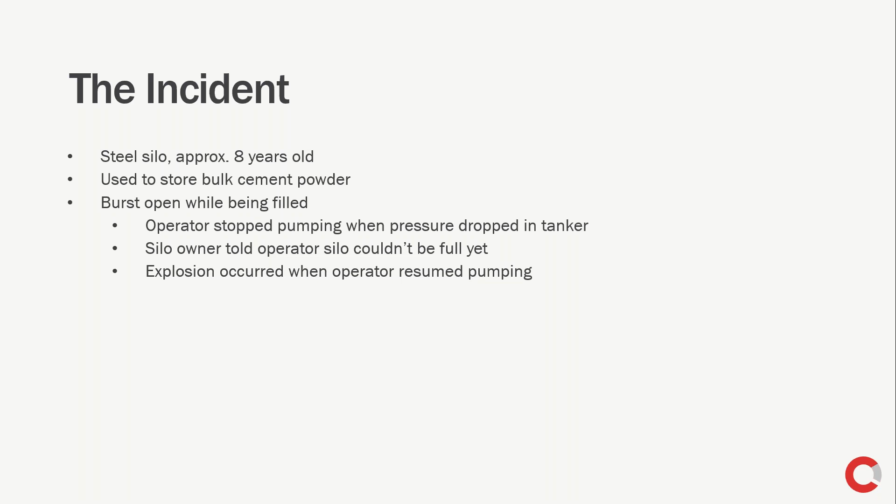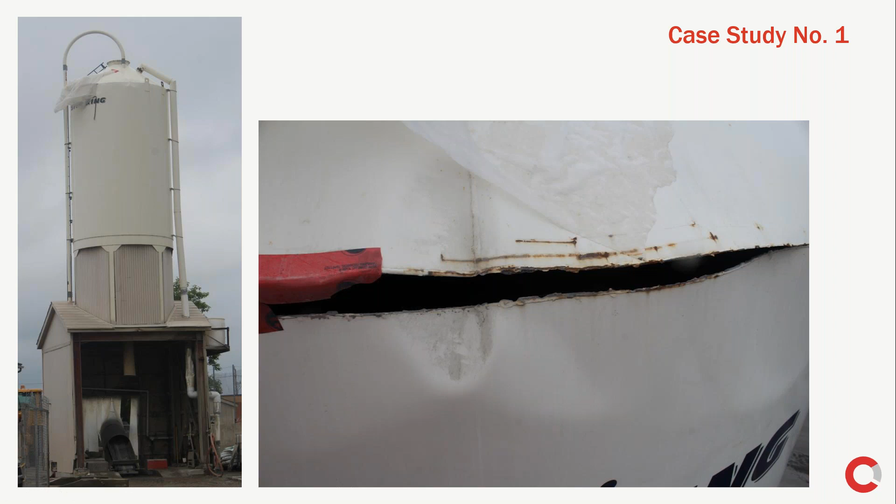So a little bit of background about cement powder distribution, I guess. So cement powder is typically transported by these road tankers. They look similar to liquid containers. They're conveyed into the silos pneumatically. That is, the powder gets fluidized by mixing it with air, and then it's driven with air pressure into the silo.

There are air vents at the top of the silo with filters that are intended to allow the air to leave the silo as it deposits the cement, and the filter prevents the cement powder from escaping through the air vent. The silos are not designed as pressure vessels. The road tanker is, but the silo is not. So the silo has a very low tolerance for overpressurization.

Now, millions of tonnes of cement are handled in this manner every year. It is pretty common. This is the standard practice. Now, as I was mentioning, if the air entering the silo is not vented adequately, then delivering the powder pneumatically can overpressurize the silo, and so you can get a rupture, either the wall rupturing, or you can actually eject the filter through the vent pipe, or it can blow the silo lid off. And in this case, that's where the failure occurs, at the silo lid. So this adequate venting is critical.

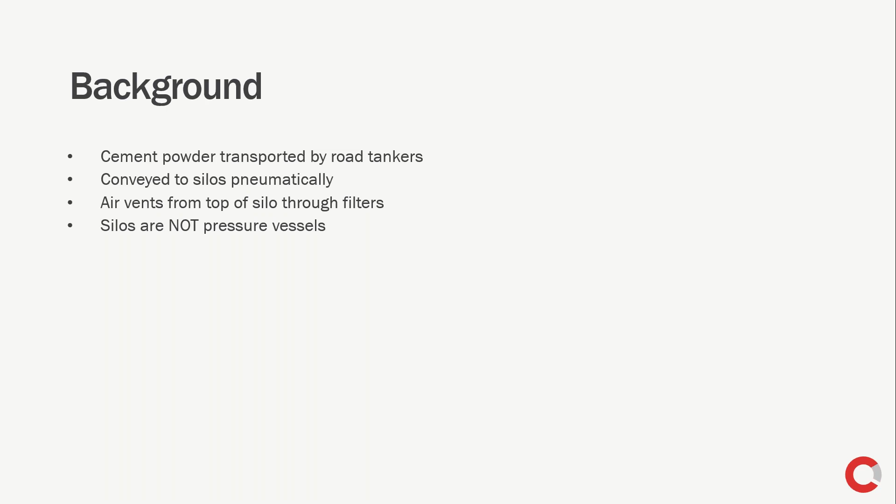And this is a diagram that helps illustrate a little better. So we have the tanker. This is designed as a pressure vessel. They connect a flexible hose to the feed pipe, and then the cement powder is driven pneumatically into the silo. Here we have a filter. It's a little different depicted here than on the subject silo. Here they're also showing a pressure relief device, which is fairly common for these silos. They would have a pressure relief device in order to prevent overpressurization in case of operator error or something.

So down here you'd have a pressure operating around 29 psi, but up into the silo, your pressure would be typically around 1 psi. And if you exceed that, you're putting the silo at risk of failure. So in this particular case, they didn't actually check the level before filling. So when the operator arrives to deliver powder, the standard practice is the operator checks with the owner to verify what the level of the powder is in the silo, so they know how much to deliver.

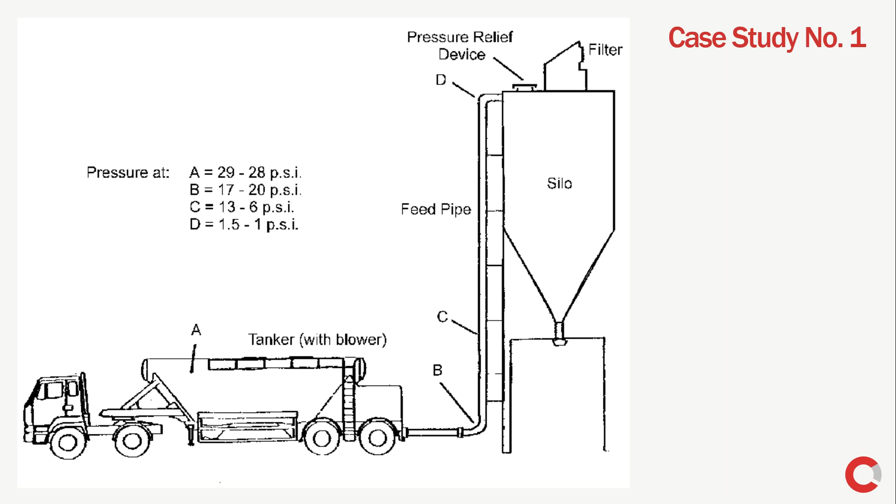Now, at this particular property, the owner didn't have any sensor system or anything, so the only way to check the level of the silo would be to climb up the ladder and look at it physically from the inspection board. And so they didn't bother doing this because that's too much work. So the way they checked the level was they used their handwritten records and did arithmetic. So they had handwritten records of all the powder being delivered to the silo and how much they've discharged from the silo, and they just did the arithmetic and estimated the volume.

Cement powder is sold by mass, but obviously it's the volume that's important in the silo. So they estimated the volume based on density. The density actually varies by plus or minus 5%, depending on how long the powder has been sitting, because it settles over time. So this was not really a good way of checking the level. They also didn't have any safety features.

The standard practice for these things is that you would have both a pressure relief valve and warning sensors. And for the warning sensors, usually you have both a high level warning sensor and a high pressure warning sensor. So if you detect either a high level or a high pressure, you get an alarm and the operator stops pumping cement into the silo. And failing that, if it does overpressurize to some threshold, a pressure relief valve would typically be present so that the relief valve opens and releases the pressure so that you don't destroy the silo. In this case, none of those were present.

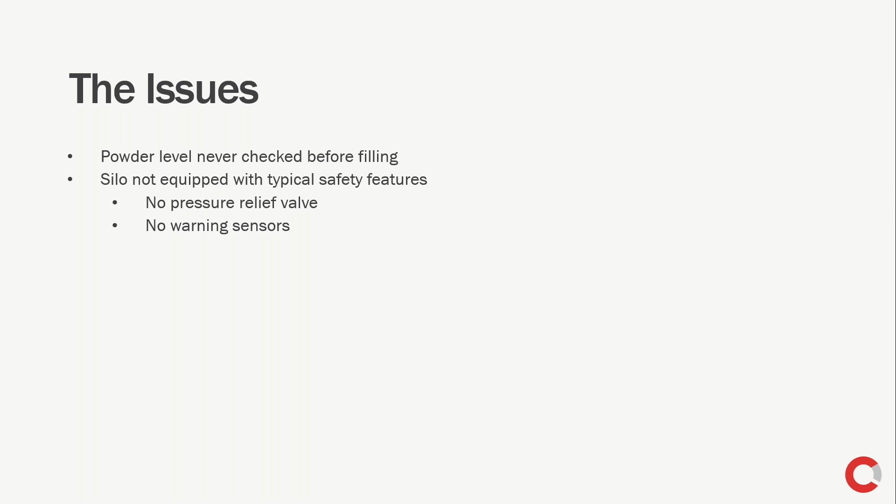And with that, I'll hand things off to my colleague Nabi. Thank you, Adam. Okay, so let me see.

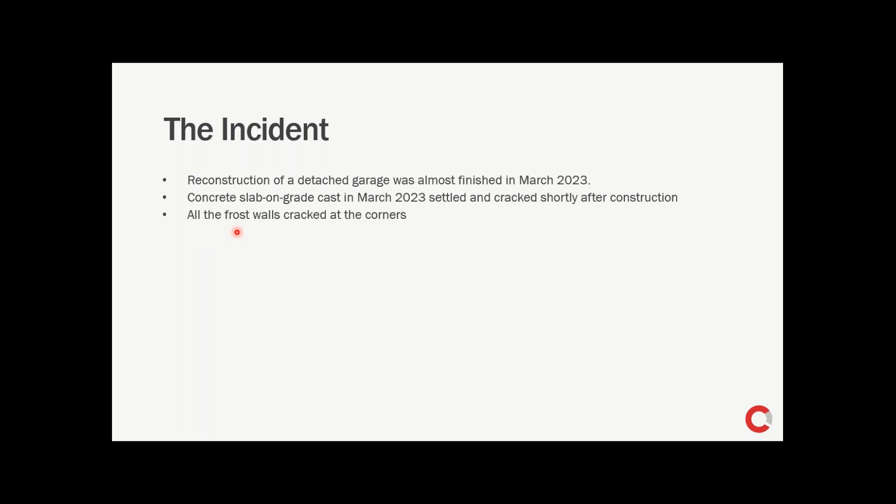So this was about reconstruction of a detached garage that was almost finished in March 2023. And the concrete slab on grade was cast in March 2023. And shortly afterwards, it settled and cracked. And also all the frost walls cracked at the corners.

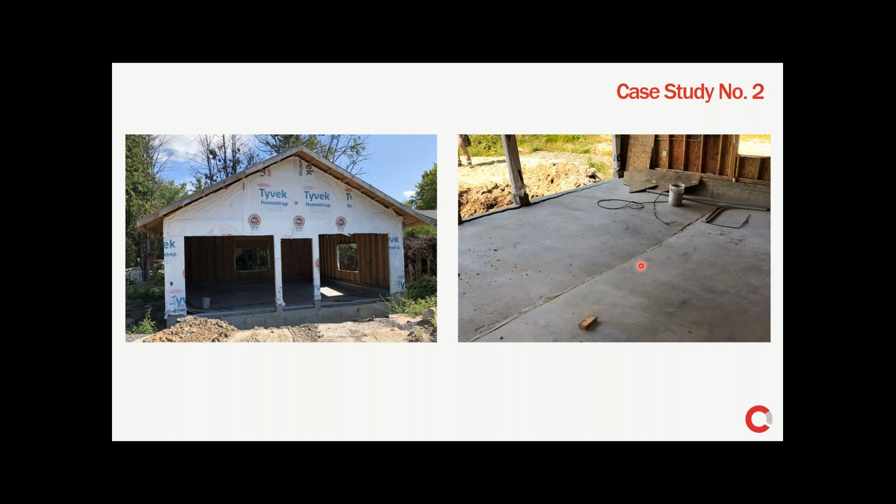So this is the general view of the reconstructed garage. And this is the view of the slab on grade. You can see that there's a wide crack across the garage, and the entire slab has collapsed in the middle.

So as a background, this was a 25 feet by 25 feet wood-framed garage with gable roof that was burnt in fire. The structural engineer at the time decided that it needs to be rebuilt, including the foundation. The frost walls and the foundation were cast in February 2023. The general contractor asked the subcontractor to place the backfill using the on-site material after the concrete was cast.

And the subcontractor warned the general contractor about the water content of the on-site material and absolved his responsibility. So the subcontractor sent a letter to the general contractor saying that because of the water content of the on-site material, we should not do that. And if you sign this letter or assume the responsibility, we will go ahead and do what you're asking us to do. So the GC retained a geotechnical engineer to assess the on-site material.

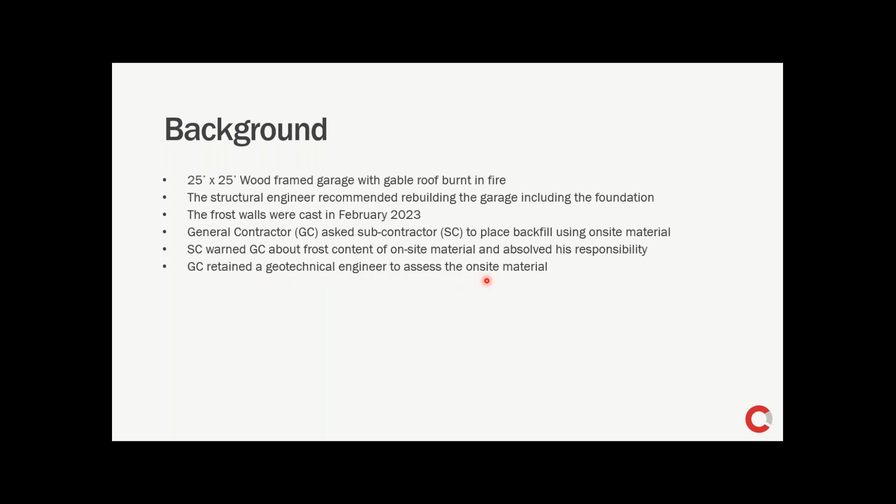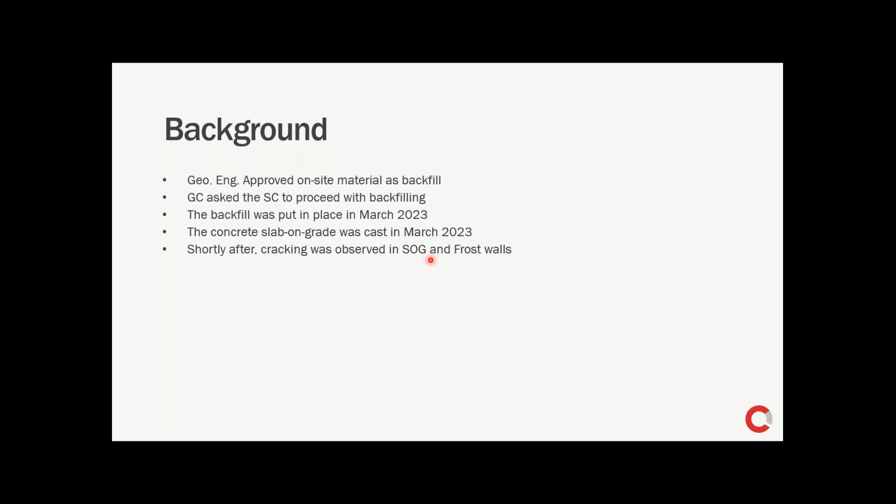And the geotechnical engineer approved the on-site material as a proper backfill. After the approval of the geotechnical engineer, the GC asked the subcontractor to proceed with backfilling. The backfill was put in place in March 2023, and the concrete slab on grade was also cast in March 2023. And shortly afterwards, cracking was observed in the slab on grade and also at the corners of the frost wall.

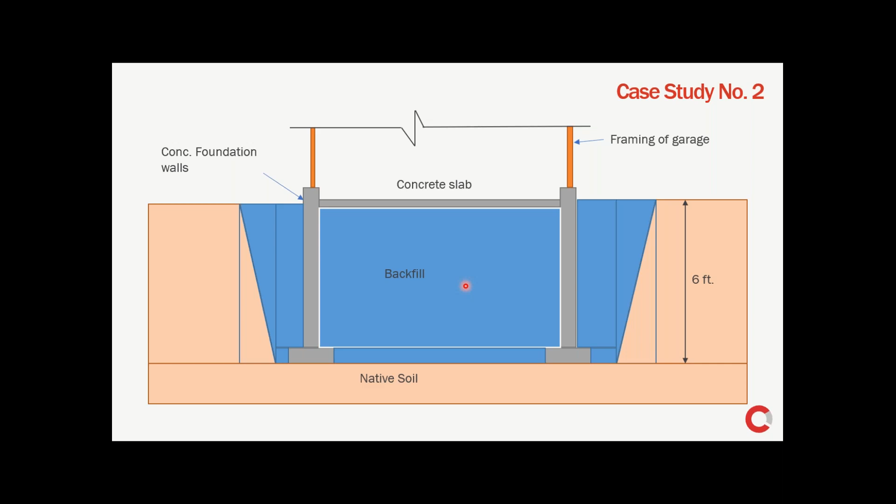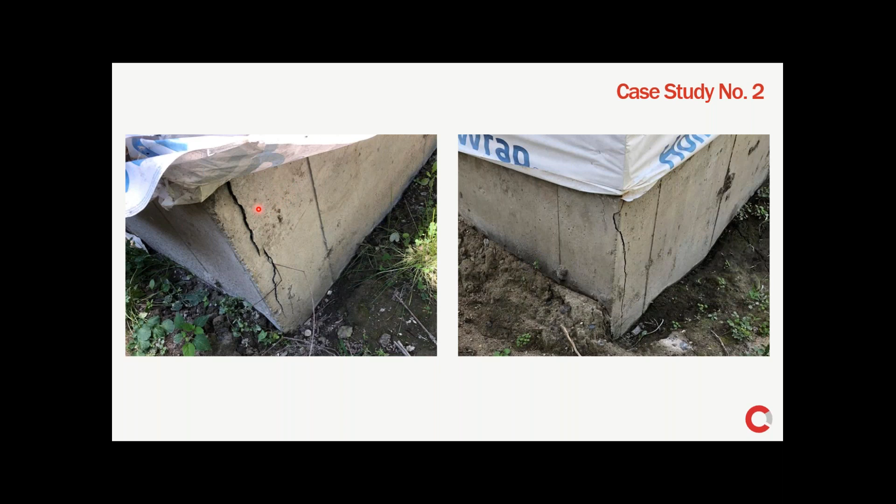These are views of the cracks at the corners of the frost walls. You can see here that the frost wall is as if it's coming out or bulging outward. Another crack, a diagonal crack at the corner of the opening at the front of the garage. You can see here wide cracks at the bottom of the opening of the garage.

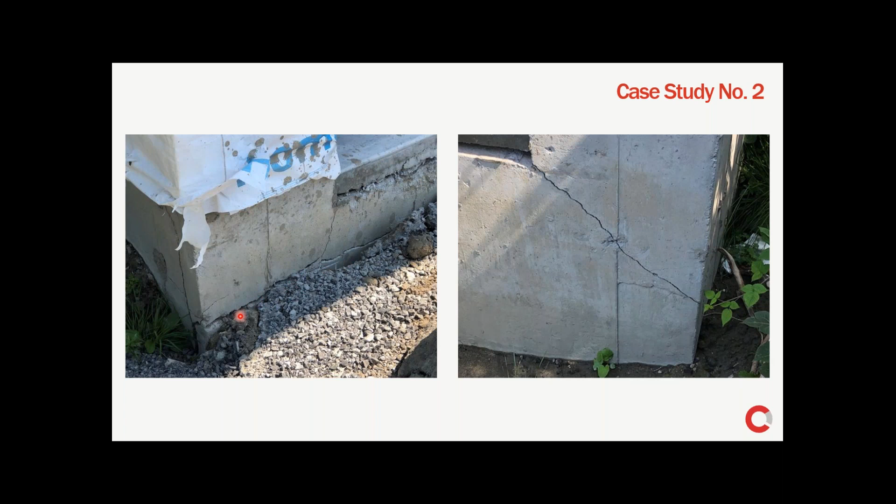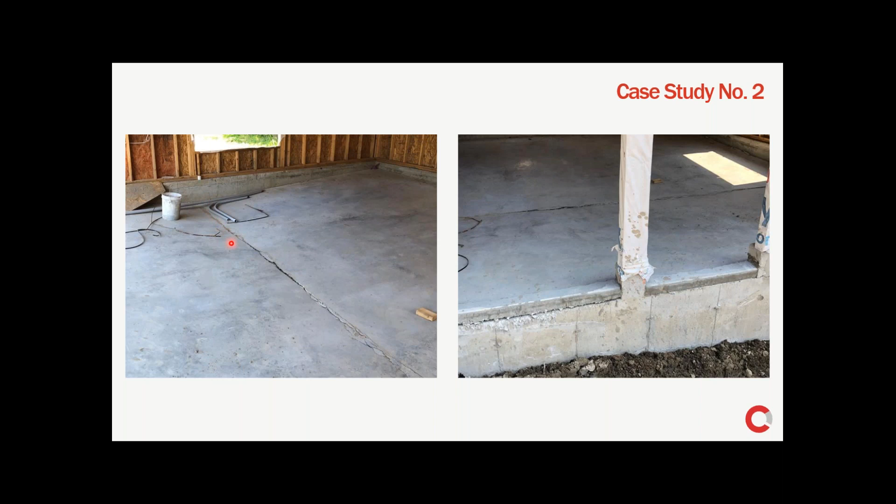Another view of the crack in the slab. You can see here that the slab has obviously collapsed by about 4 or 5 inches. Now, let's see what happened that resulted in this failure. So first of all, the frost walls were cast in February 2023. This is casting concrete in the heart of winter, Canadian winter.

So this ideally should be avoided, and if it absolutely has to be done, special measures need to be taken. You need to heat up the material beforehand, and also make sure that during the concrete casting and afterwards, the material temperature remains above 5 degrees for at least 48 hours to make sure that the concrete does not freeze. And not only that, when you pour the concrete, you also need to protect the soil around the concrete footing against frost.

Now, the general contractor asked the subcontractor to place backfill using on-site material. The on-site material was sitting there for months, and it was full of water and frost. And the general contractor was warned about it by the subcontractor. The subcontractor warned the GC about the frost content, and also did his due diligence by saying that if you push us to go ahead, we are not responsible for any failure.

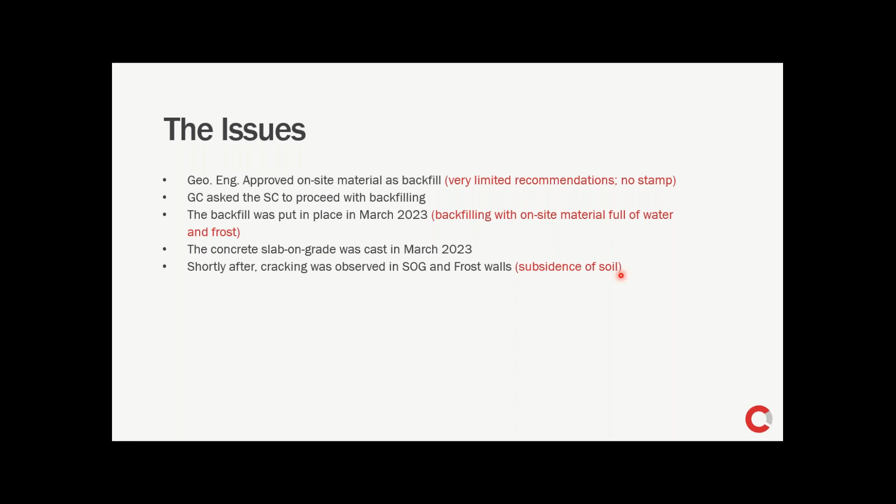So as a conclusion, just to summarize what factors resulted in this failure and how it could have been prevented. First of all, the scope of geotechnical engineering services should include recommendations on backfilling, drainage, type of soil. So a typical geotechnical report is very inclusive. This was not the case on this file.

And special measures must be taken for pouring concrete during winter, and it should ideally be avoided. And if it has to be done, the structural engineer should give recommendations on how to pour concrete, what guidelines to follow, how to heat it up, how to protect the concrete from freezing, and how to protect the soil from frost. And plus, ideally, it should be avoided.

And generally, any final report that is prepared by an engineer and that is to be relied upon must be sealed with the engineer's stamp. And if something is not final, the client should be advised about it, and it should not be implemented.

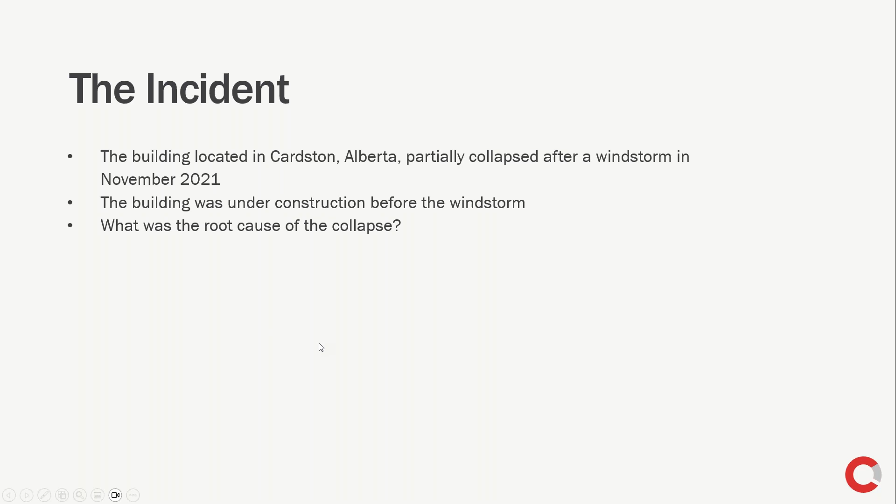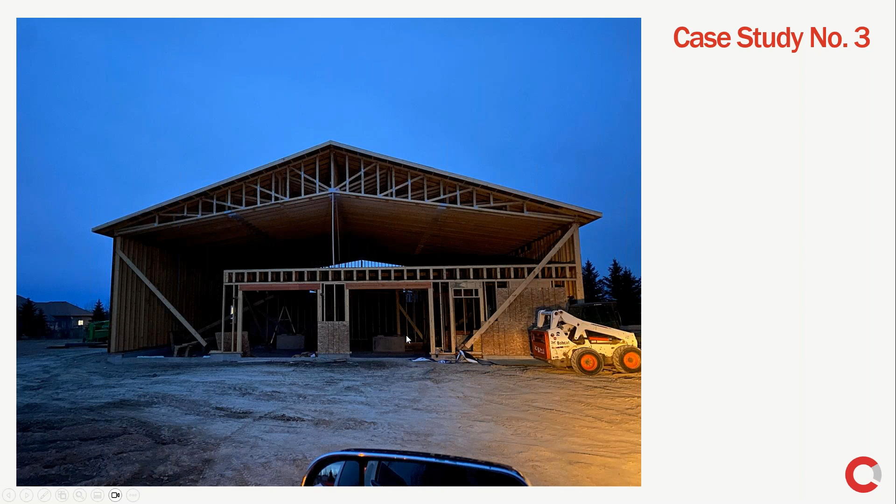Partially completed buildings like this are typically unstable by themselves and require temporary bracing, like these, to withstand various expected loads, including construction load, wind, snow, and seismic loads. We'll delve into the topic of temporary bracing or falsework later in the presentation.

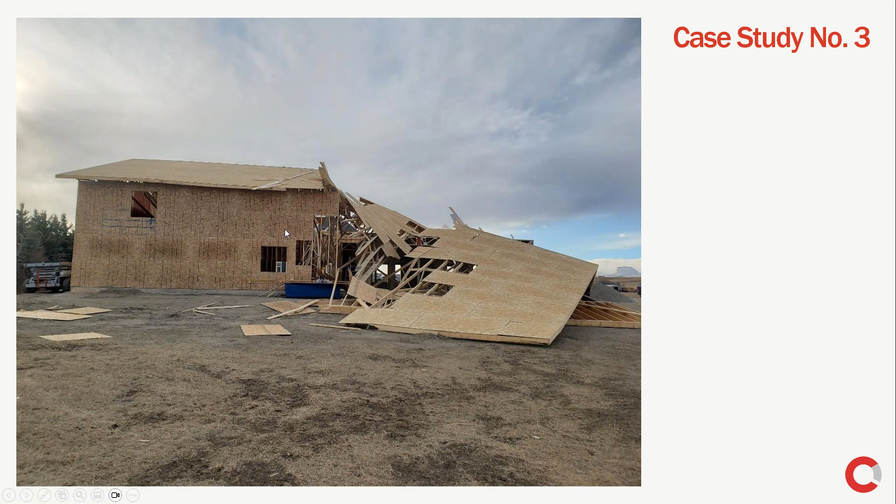Before that, let me provide some context for this claim. Our involvement actually didn't begin until after the building had been demolished and reconstructed. We were retained by the adjuster representing the insurer of the framing contractors, who was the insured in this case. Prior to our involvement, a couple of other experts had already been involved, and they had already investigated the cause of the collapse, but they had different and conflicting opinions.

The expert representing the building owner claimed that the collapse occurred due to the building being left unprotected against the wind during construction by the insured, the framing contractors. On the other hand, the expert representing the insurer viewed that the windstorm was the cause and that the insured had provided some protection during construction. So who was right in this case? That's why we came in.

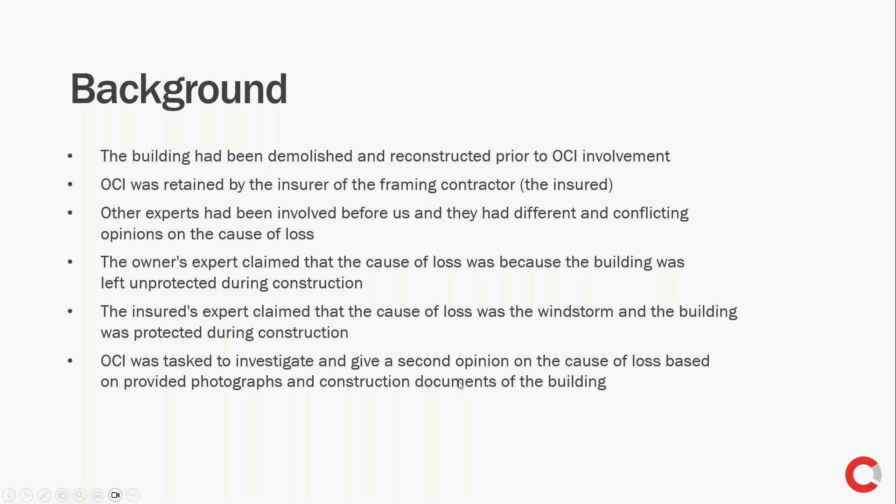Origin and Cause was tasked to conduct an independent investigation and offer a second opinion on the cause of loss. We were provided with photographs taken by the insured before and after the windstorm, as well as some construction documents related to the collapsed building. So our initial step in the investigation was to determine whether wind was the primary cause of the collapse or not. To do this, we gathered wind data for the date of loss from 3 nearby weather stations.

We then compared the maximum wind gust speed recorded at these stations with the minimum requirements outlined in the applicable building code. Based on the data collected from the weather stations, we found that the maximum wind gust speeds at the site of the incident were approximately 100 to 120 km per hour on the date of loss. Looking at the building code climatic load specification, this building and any of its falsework was required to be designed for a minimum wind gust speed of around 150 km per hour. This is greater than the wind speed that we collected at the weather stations, which is about 100 to 120 kilometers per hour maximum.

Given this information, if the building structures and the falsework met the building code requirements, it is very unlikely that the subject building would collapse. So we can conclude that wind was not the root cause of the collapse. It was something else. So the previous expert representing the insurer was wrong. After ruling out wind, our next step involved a thorough review of the photographs supplied by the contractors and analysis of the construction documents pertaining to the building.

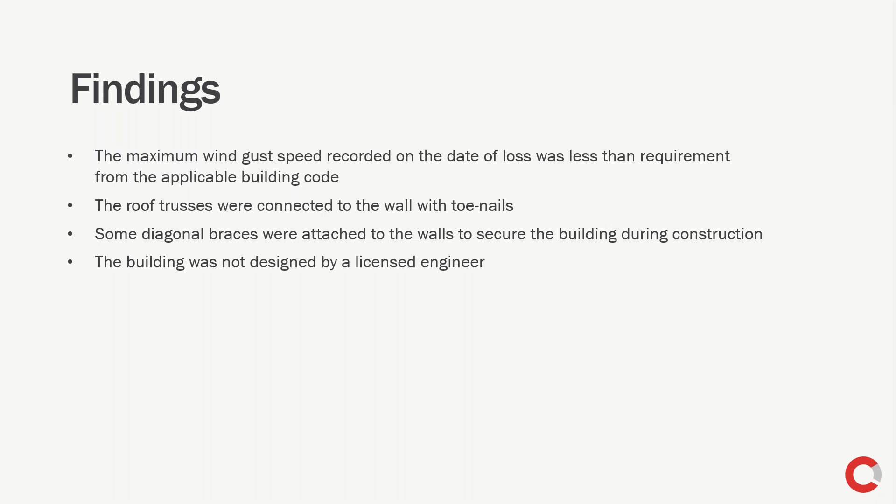Through a discussion with the insured and a review of the provided photographs, we found that the trusses were toe-nailed to the wall double top plate with only 3.25-inch nails at each end. This practice is standard for small buildings that don't require engineering. However, in accordance with the National Building Code, this standard practice doesn't apply to buildings with roof trusses exceeding 40 feet in span. In our case, the roof trusses had a span of 60 feet. Typically, for buildings that have a long roof span like this, trusses need to be secured to the wall double top plate using hurricane ties, because toenails lack the capacity to withstand the wind uplift forces that the trusses likely experience.

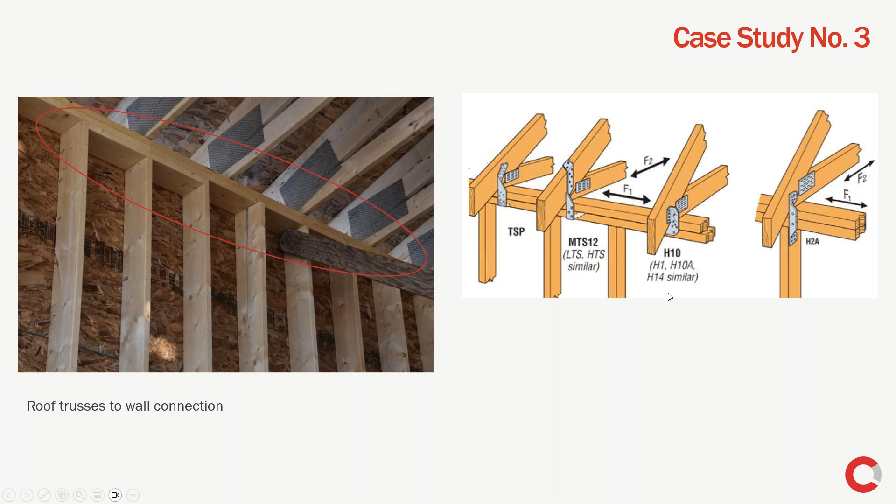Second finding, temporary false work. From the photos provided to us, it was evident that the temporary false work installed by the insured to brace the exterior walls against wind load was inadequate. This false work featured LVL braces, which were anchored to a concrete block at one end and attached to the wall stud at the other end using wood screws.

So we did ask the insured why they used toenails instead of, well, before that, we were wondering why these failed. And then after we did some study, we found that they were too slender for the task. To properly support the structure, either there should have been more braces or they should have used larger members for the braces. Such a mistake could have been easily prevented had the insured retained an engineer to design their false work.

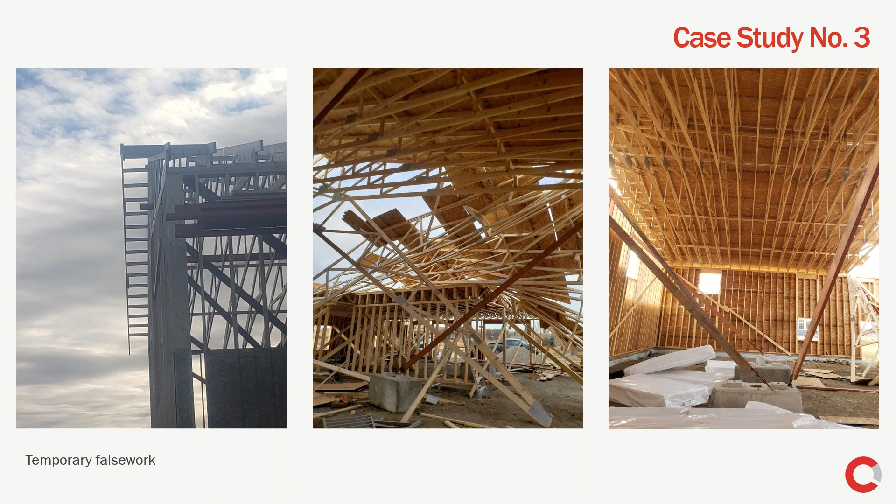To get a deeper understanding, we conducted a thorough review of all available construction documents related to the subject building, leading to our third significant finding. We discovered that the building was not engineered, which might be okay if this were a small building that met certain requirements of the building code, but definitely not for this building with a long roof span of 60 feet. The general contractor did not engage an engineer to aid in the design of the building, even though the building was required to be engineered based on its roof span per the National Building Code.

As a result, the construction documents provided to our insured were poorly put together, lacked many important details, including how to properly fasten the trusses to the walls, and generally fell below the minimum accepted standard expected from a competent professional engineer. And that could be the reason why the framing contractor, who is our insured, did not do a proper job, because they were building based off a terrible set of construction documents provided by the general contractor.

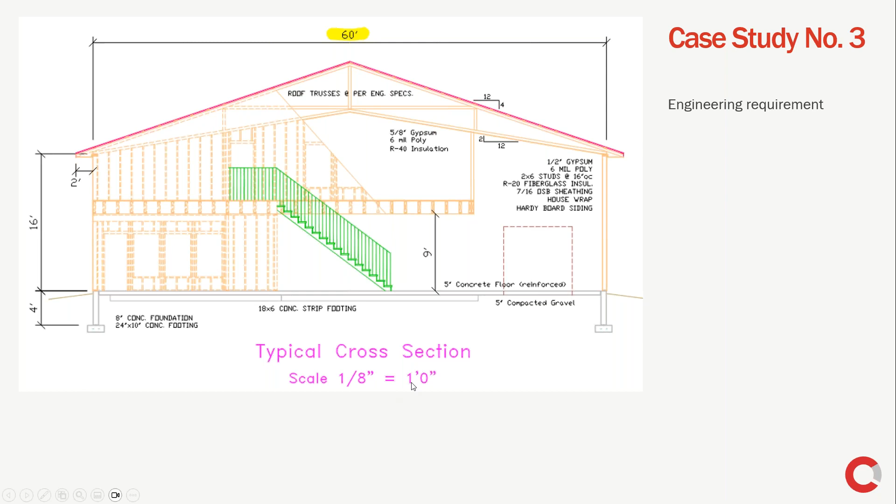So in summary, although the subject building likely experienced heavy wind gusts on the day of loss, it was not the primary cause of the collapse. The incident was primarily due to the failure of the toenail truss-to-wall plate connection and the temporary false work, which were installed by the framing contractor, our insurer. These connections and temporary structures were not engineered and did not meet the requirements of the applicable building code for the subject building and location.

However, the framing contractor should not be the only one to be blamed for this collapse. There were other major contributing factors as well. The building was not designed by an engineer, despite this being a requirement of the applicable building code, which resulted in a substandard set of construction documents with numerous important details and information missing. And this is the general contractor's fault, and they should be held liable as well. Additionally, it is worth noting that the company responsible for reviewing and approving the building permit failed to fulfill their duties, allowing the construction of the building despite it clearly not meeting the applicable building code requirements.

In cases like this, it is common for people to jump to the conclusion that a natural disaster, a windstorm, is the obvious and most likely cause of loss. However, as I have just presented, the devil is in the details. So that is the end of my presentation. Let's move on to Q&A.